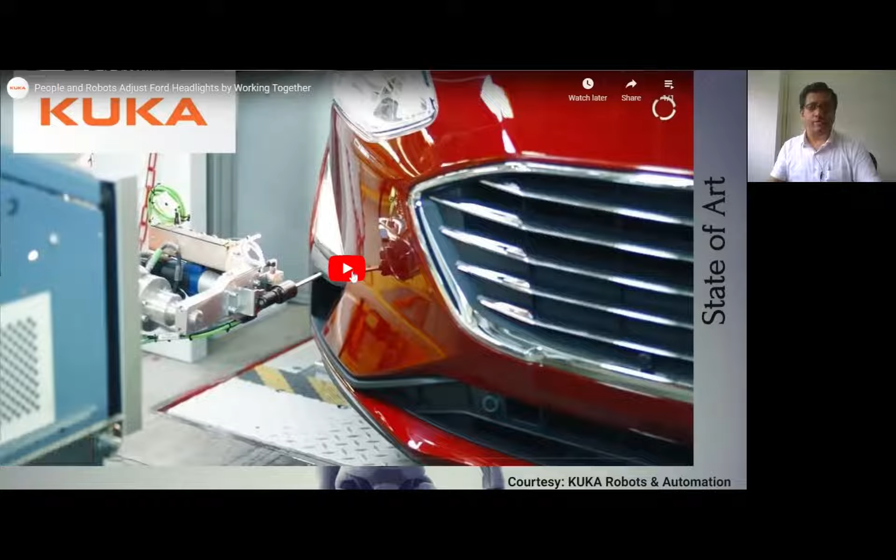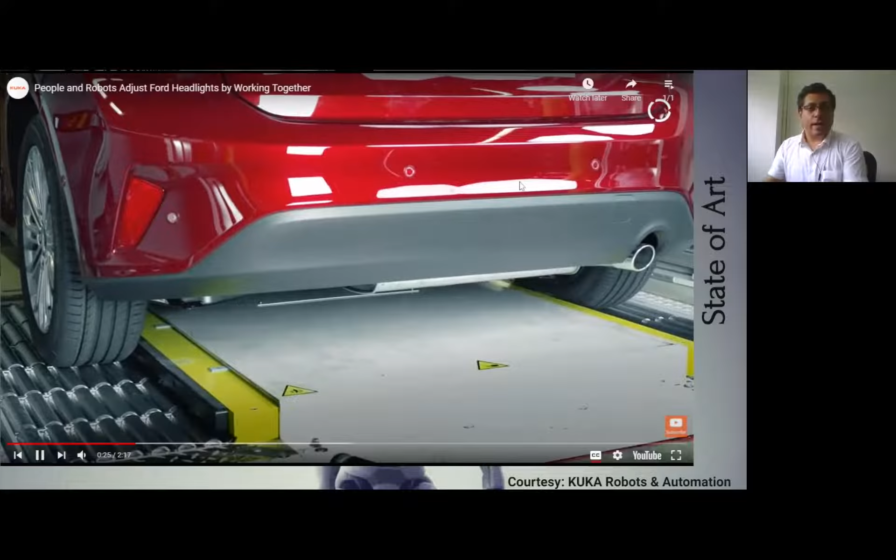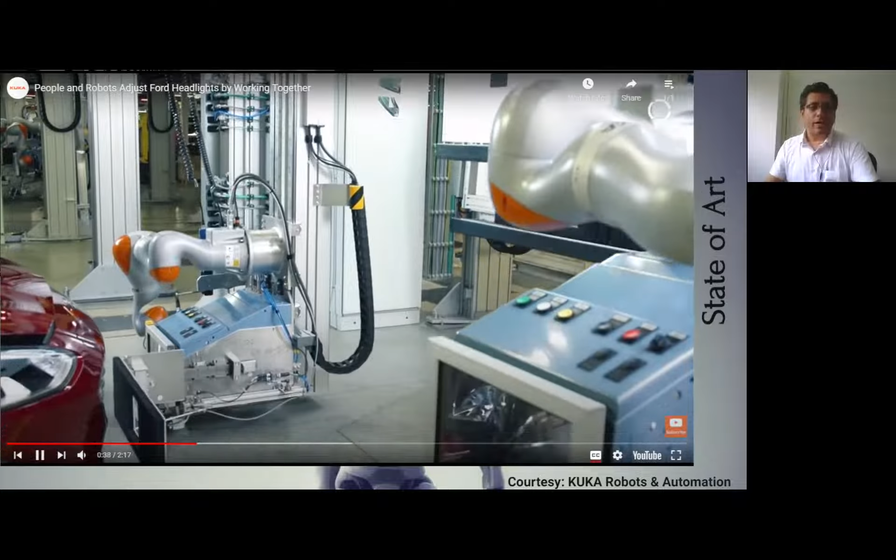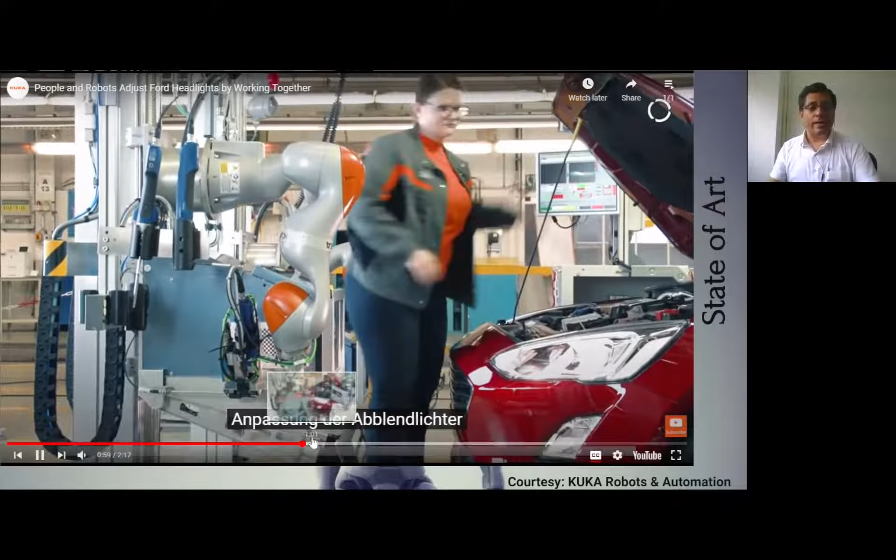What we see here is a Ford manufacturing unit where the headlamps are being adjusted by a collaborative robot. Here the robot works with some accessories or ancillaries, so I think the important part to show here is robotics is not just the robots. Robotics is the subsystems. Robotics is sensors. Robotics is the integration of everything you see on the screen, as well as human interaction, where a person attends with the robots.

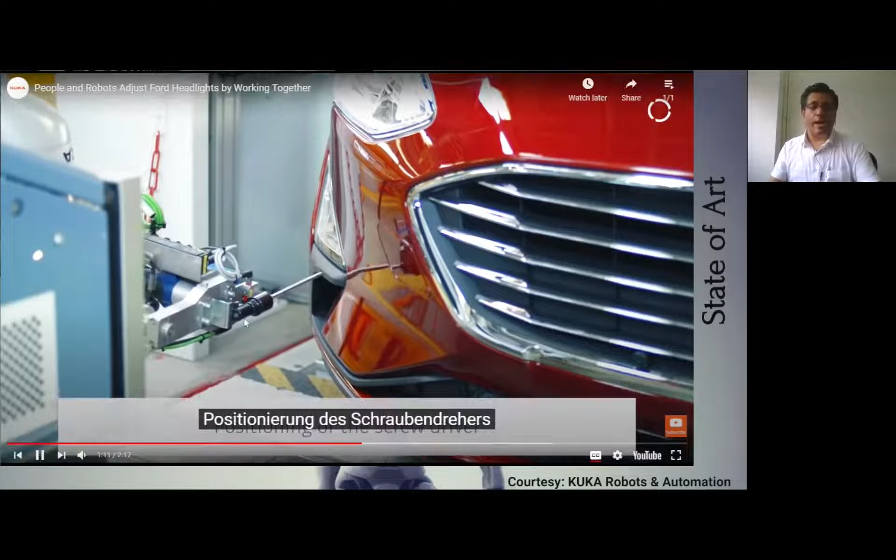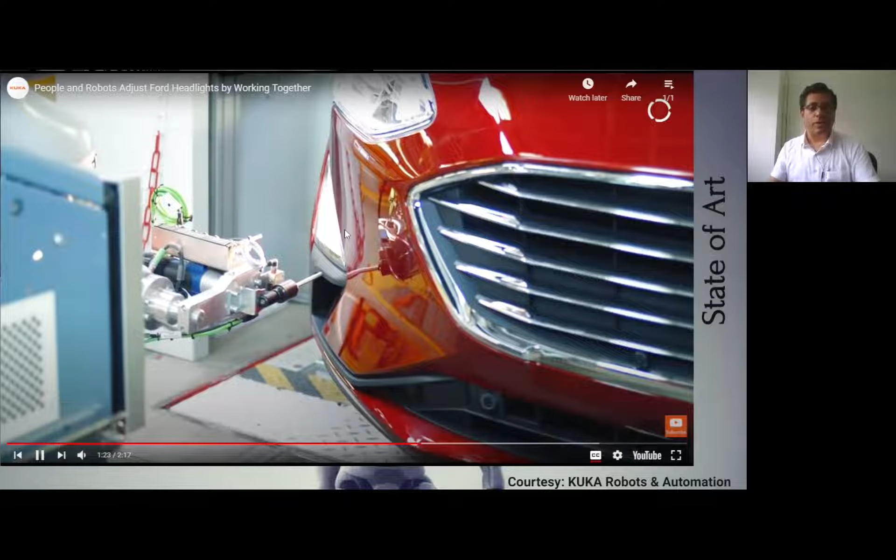So what you see on the screen is a robot that adjusts the focus of the headlight on the car, adjusting along with the person operating the vehicle or the setup. This brings a safety aspect as well, where people are working with the robots and using the technology along with it.

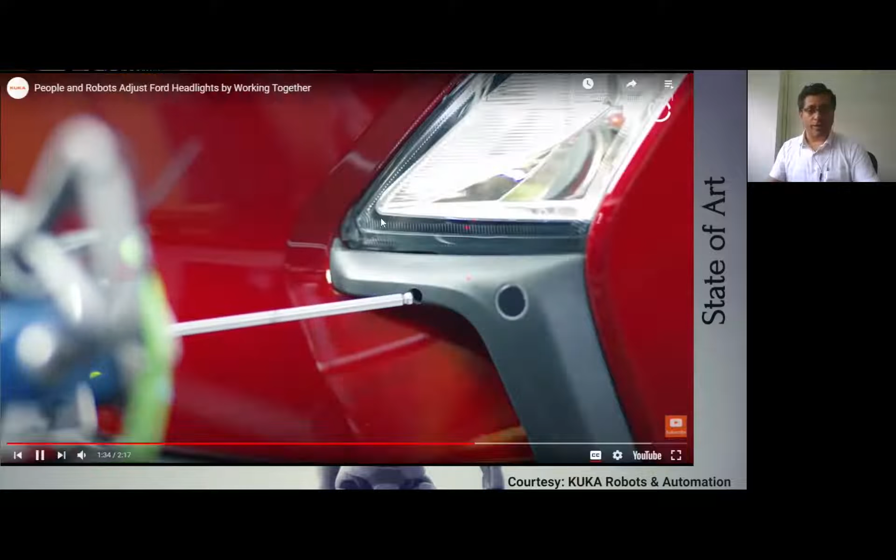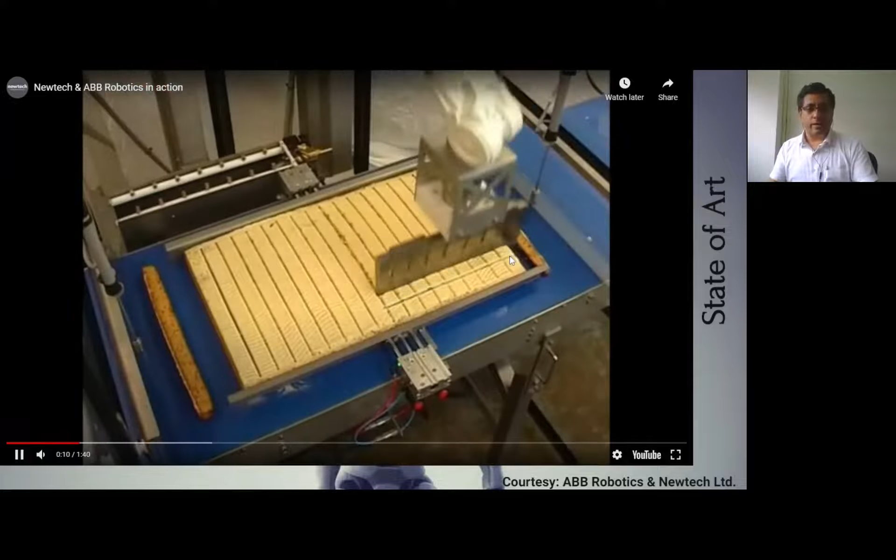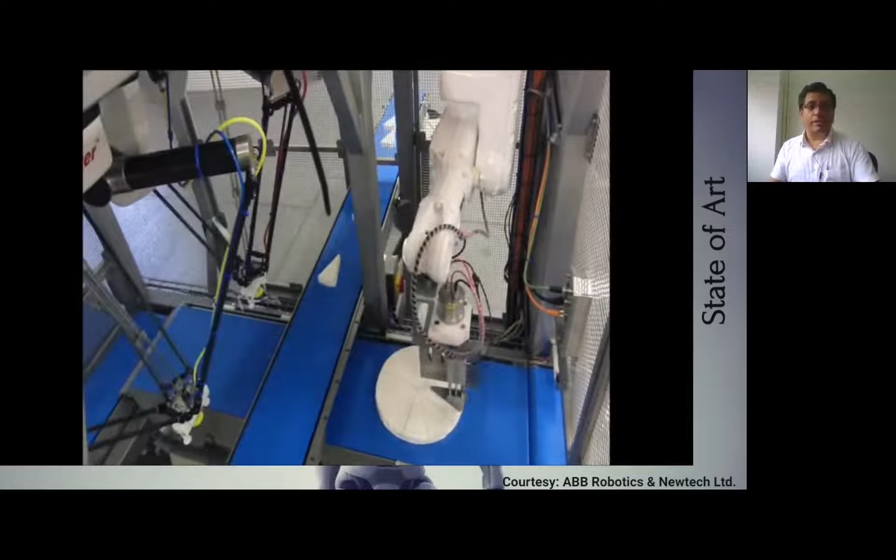I'll just move forward to the next video, which is pretty fascinating in terms of the flexibility and diversity it is handling. This is by a company called ABB Robotics and a Newtech Limited. This is, of course, taken from YouTube, but it depicts the flexibility or speed and type of robots you see acting fast on food grade items.

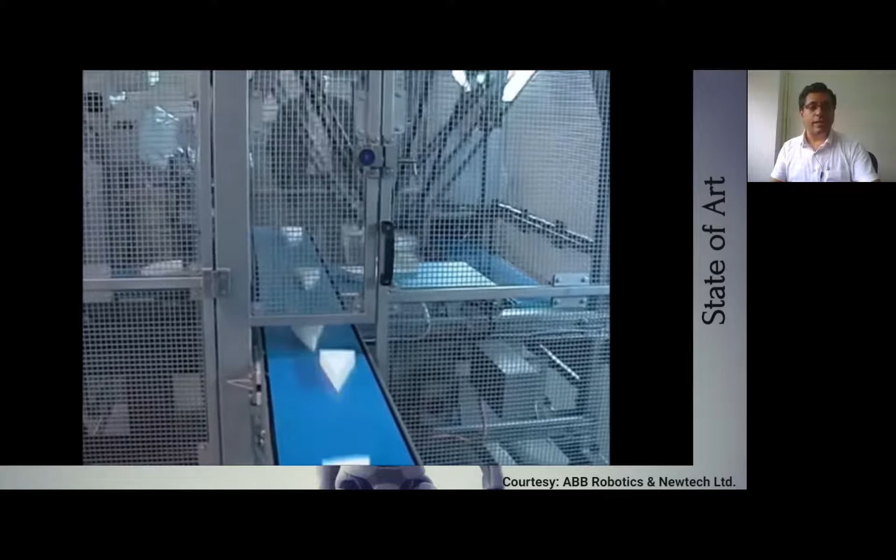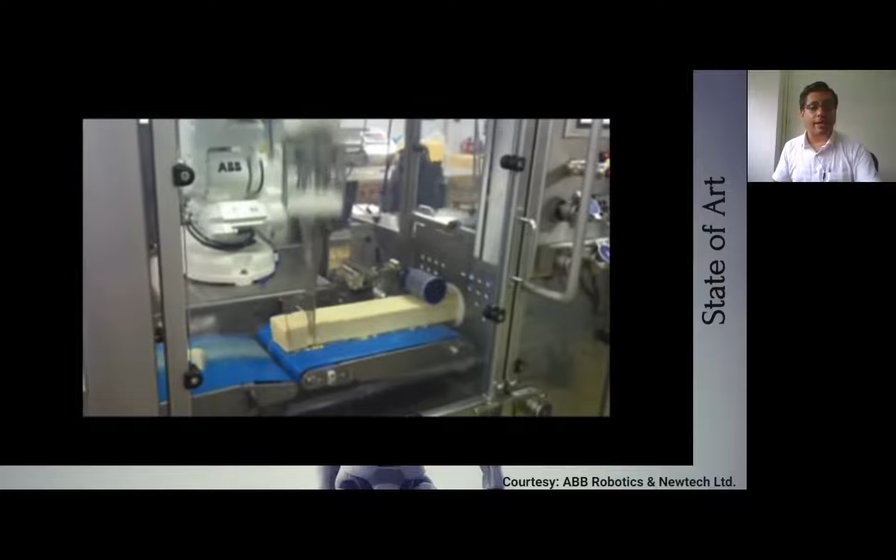So these are sandwiches, cheese blocks, chocolates, and everything. This shows speed, accuracy, and agility to handle food items, making sandwiches at the speeds required, and also being delicate to handle the food items. So it's not always about industrial items. Handling food grade products is also one of the leading areas where robotics are used.

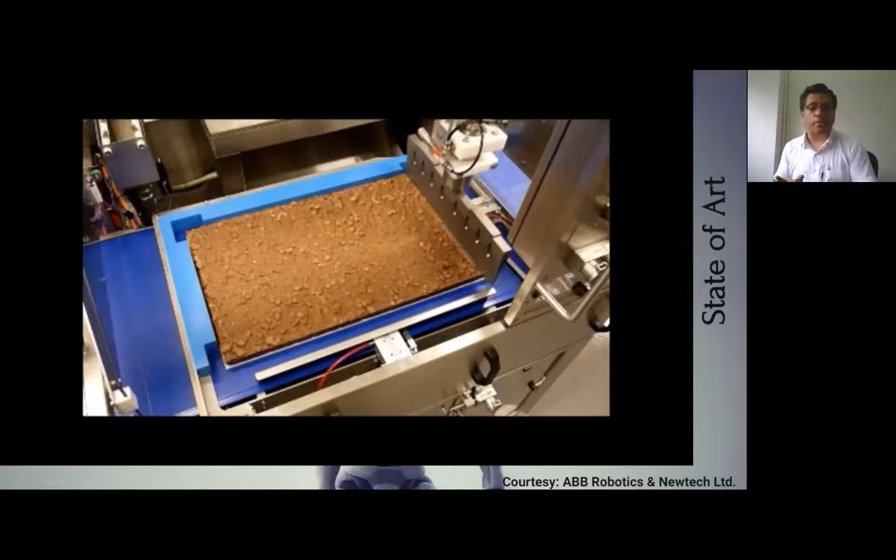Now, if someone wants to make this or handle this, what all things are needed, which we will cover in the next few slides.

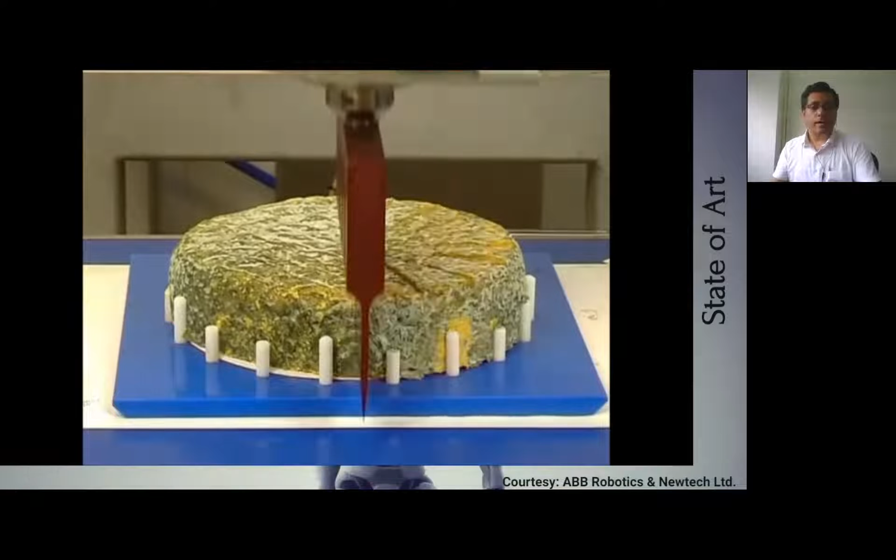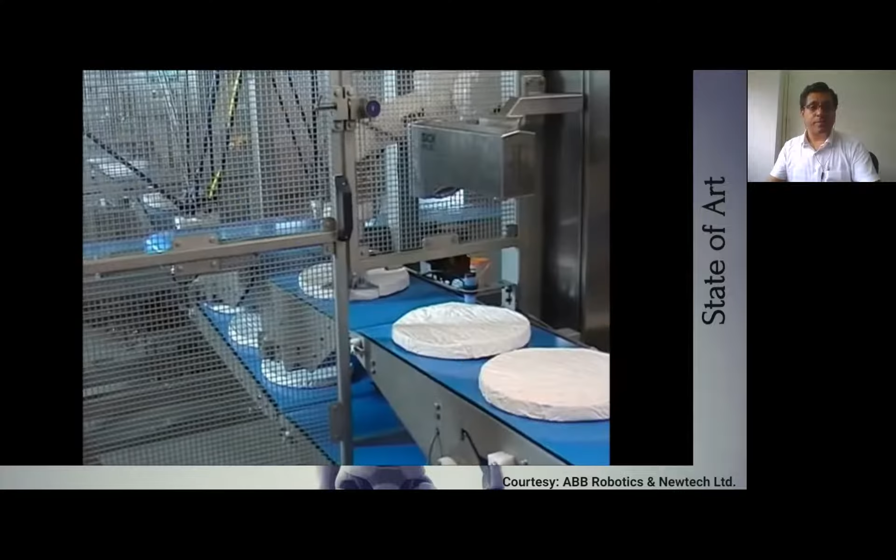Now, in solving these problems, there are many skills needed, which we will see. This is one of the very fast robots, which takes the cheese cubes onto a conveyor, in a feta cheese manufacturing unit.

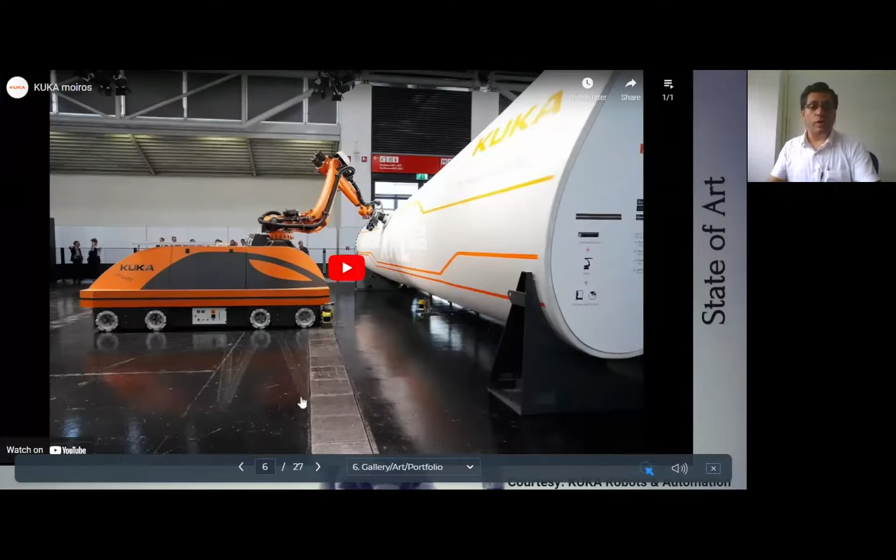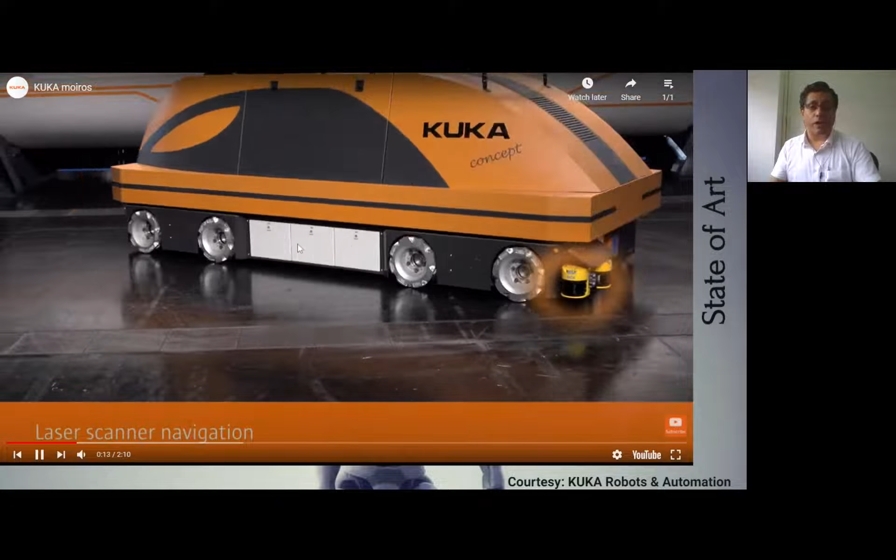We'll go on to a different type of robot, which we call mobile robots. The mobile robot is the moving type of omni-wheel robot mounted with an industrial robot. That becomes a very sweet combination of industrial as well as mobile robots, which will do certain operations on parts which are very big.

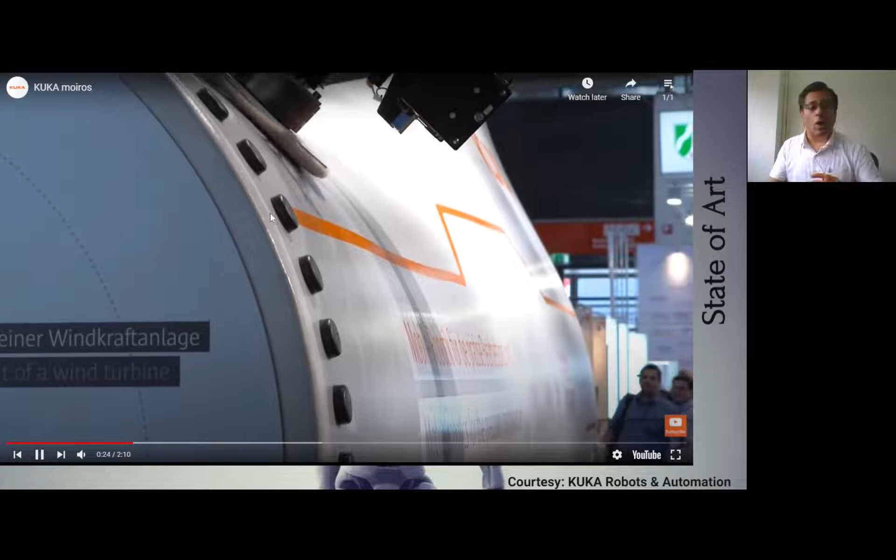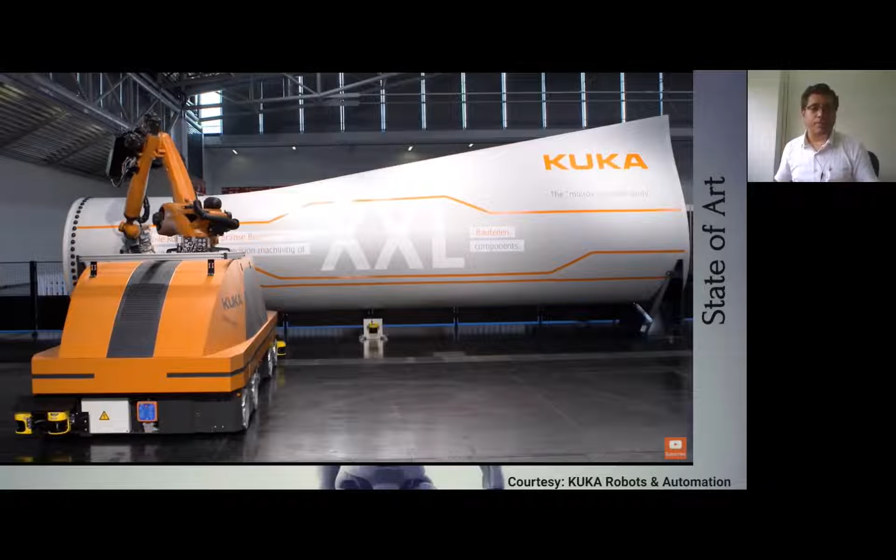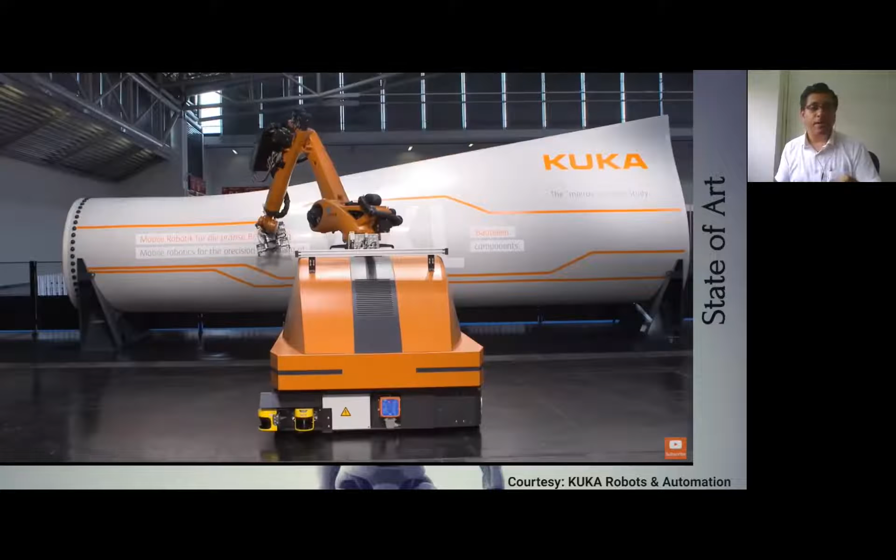So the robot cannot move on its own. It is moved now on a table or on a vehicle, what we call AGV, automated guided vehicles, or autonomous mobile robots. Today's webinar is limited to industrial robots, but this depicts integration of many technologies together. So there are grippers, machining or material removal processes, sensors, safety sensors, and a shop floor process. All these are depicted well in this video.

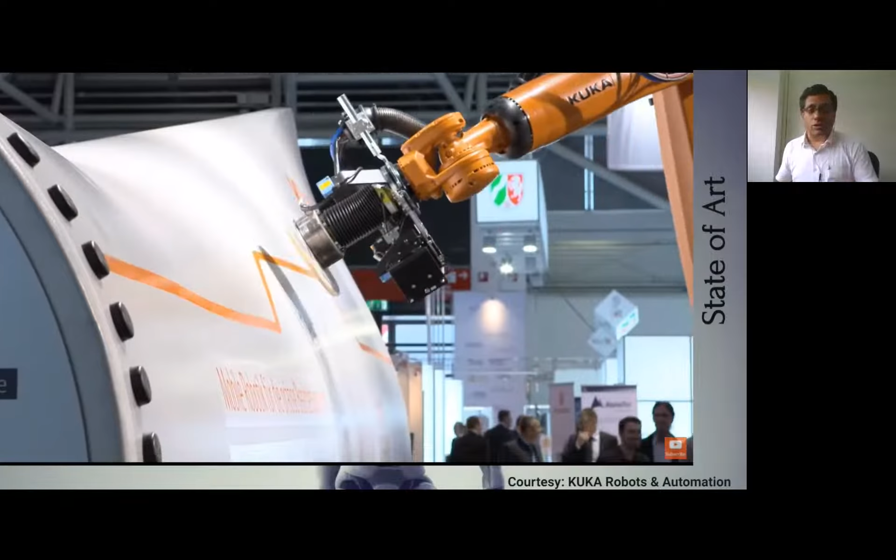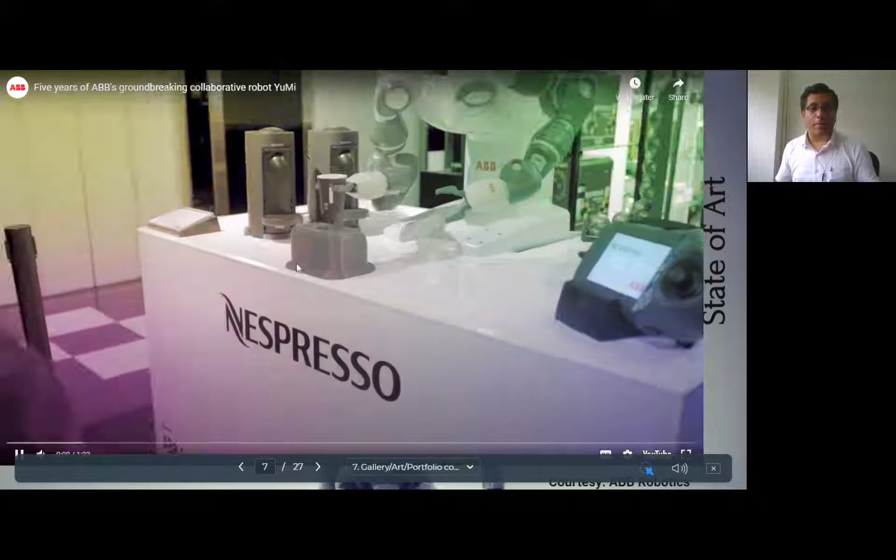What looks like a good solution in the video took many hours to make. I'll move on to the next video, showing the upcoming future of robotics: collaborative robots.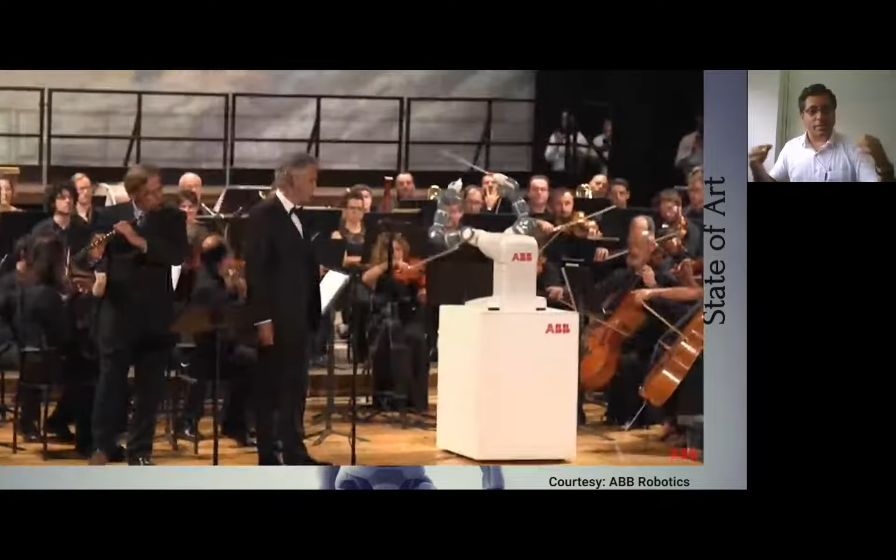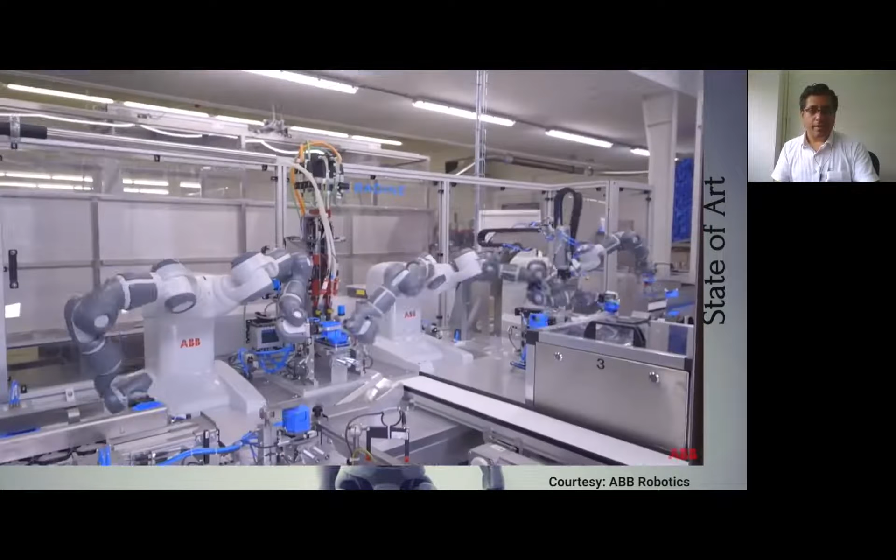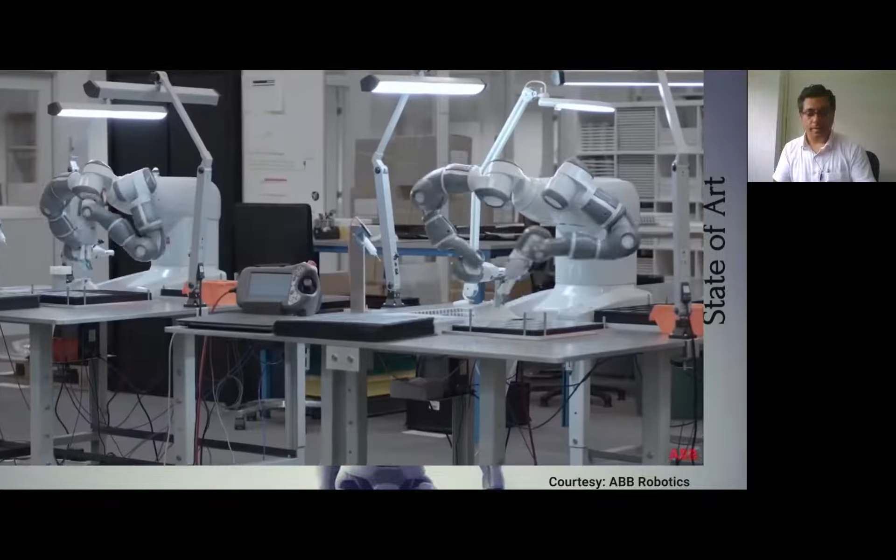This collaborative robot has two hands that depict human hand movements. It's safe to operate. For industry, the advent of a truly collaborative robot working alongside human staff has been little short of a revolution. The robots work with human operators safely, so operators don't have to stay behind cages. Ergonomic human-centered design, padded arms, and motion control software can be installed in workstations alongside people, working collaboratively on tasks with human colleagues. Lead-through programming means it can be programmed in minutes by someone with no specialized training. That makes it ideal for material handling and assembly jobs, while its accuracy has meant it's found a place in medical research too, increasing hygiene and efficiency.

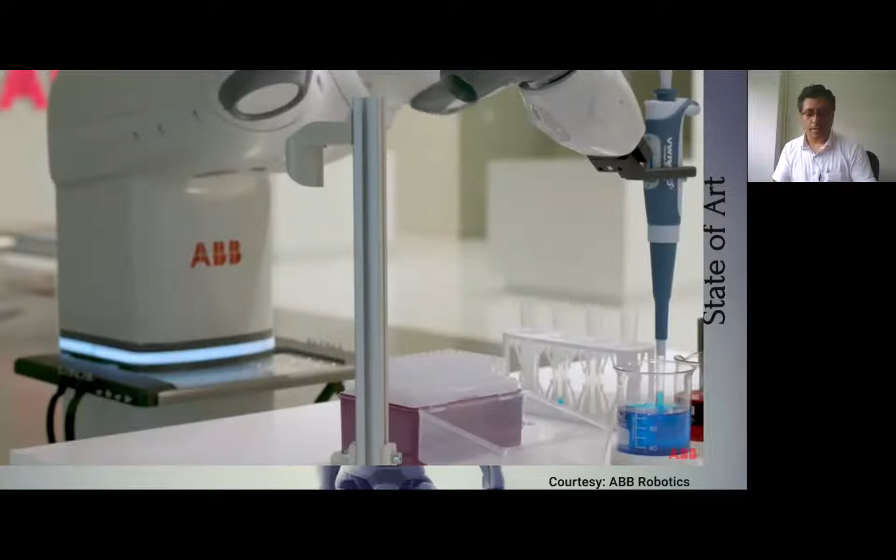The YuMi family has continued to grow. The concept of a mobile YuMi has been tested, so now the collaborative robot mounted on a mobile robot makes it more effective.

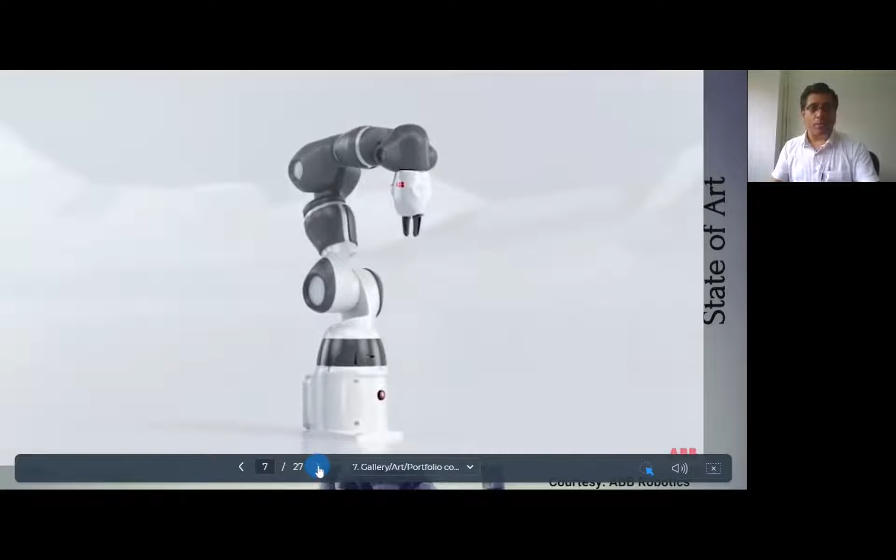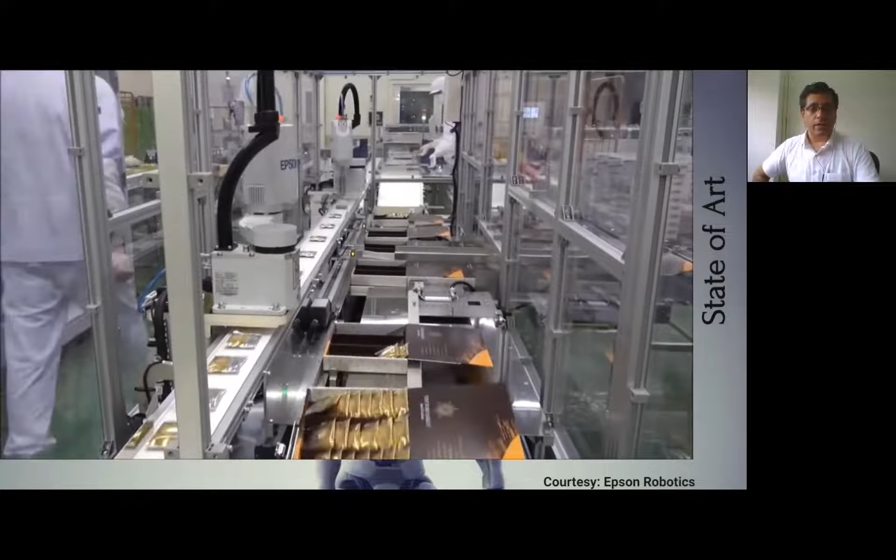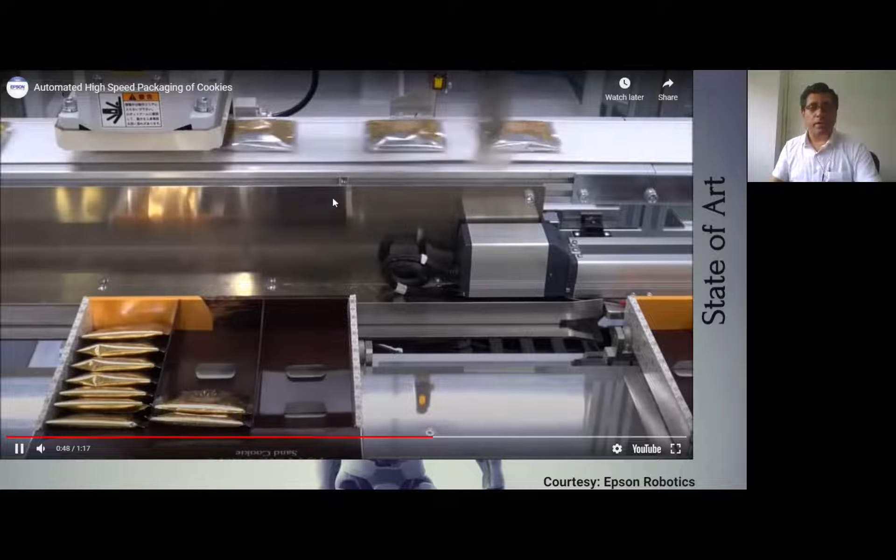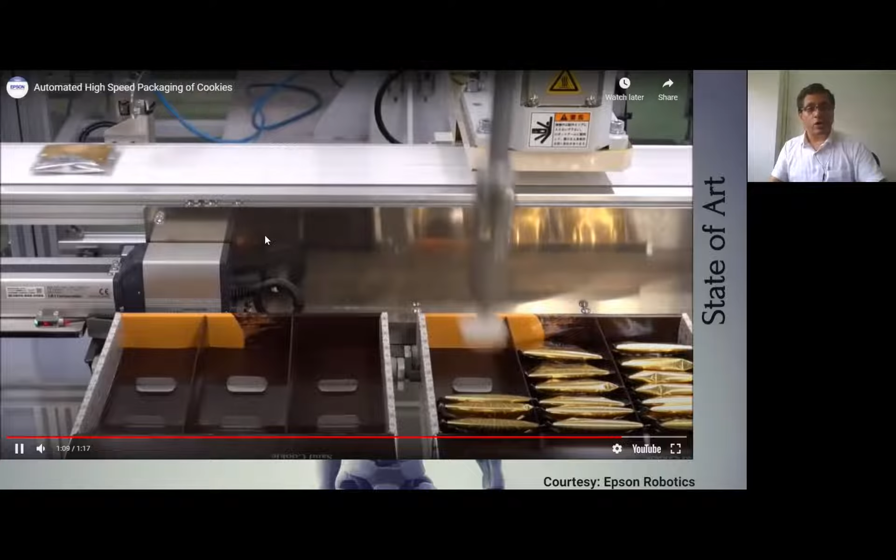What you see on the screen is one robot operating, but you should also see all the sensors blinking around, all the conveyors and conveying systems, and the control system commanding this. You'd see a lot of motors, conveyors, and sensors on the back end where my cursor is moving. So many things go along with robotic solutions, and we'll cover what it is.

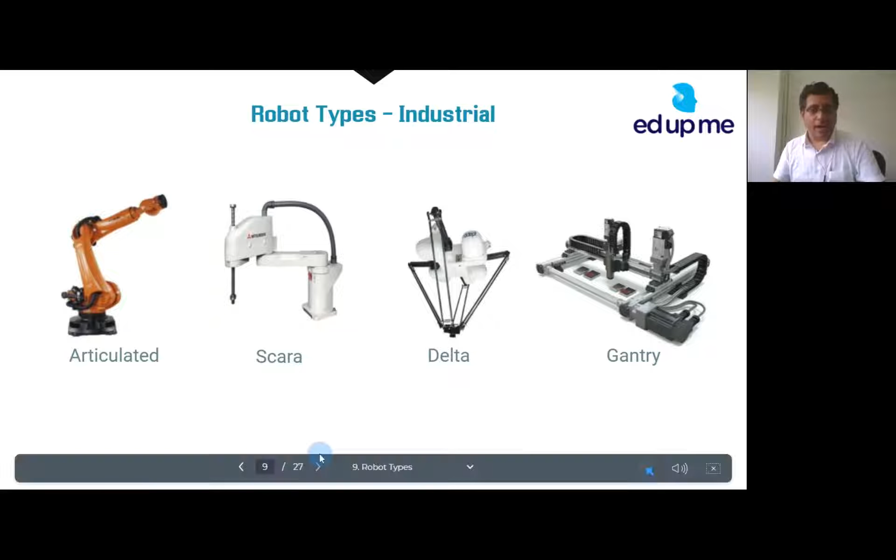Typically, there are four major types of industrial robots for any robotic solutions: starting with the gantry on the most right-hand side, which is a 2, 3, or 4-axis solution, a primitive but widely used and known robotic system. Delta is one type of robot mounted on the ceiling, around 4 to 5 axis. SCARA is around 4 axis, and articulated, on the most left, represents human hand-like motions. We will cover all these robot types and how to select, when to select, which is the major point of this webinar.

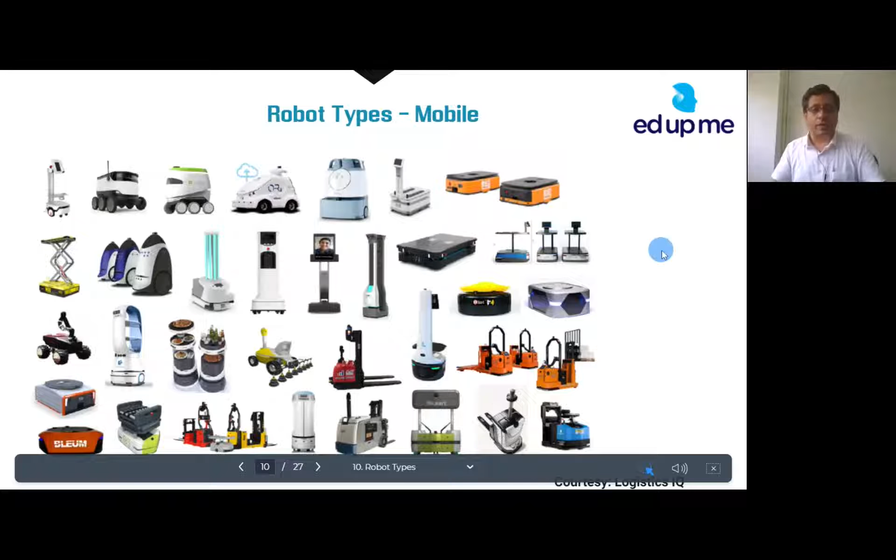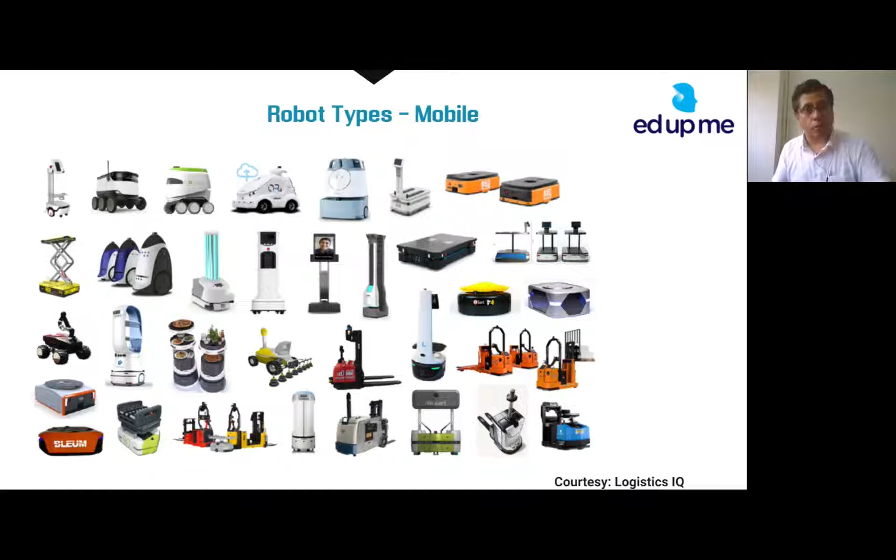Before that, we will also cover some mobile robots in the next webinar sessions. This is interesting, just to keep the sensation going: these are the types of mobile robots now available in the market for various applications, starting from food delivery to video calling, hospital sanitization, warehouse moving, inspections, material moving, and so on. This is becoming a newer market now, with an onslaught of mobile robotics happening. When industrial robotics is attached to mobile robots, it opens up a whole new opportunity for the market out there. This is just to set the tone.

On robot selection, we have divided it into a very basic aspect. I'm sure the audience will see how we approach this, because of our experience integrating a lot of robotic solutions, from ground zero upwards. The first criterion is application. That's where normally a robot selection starts, which is the environment.

Due to space restrictions, we've listed only 4 environments: hazardous or dusty, EMI-free which relates to electronics assembly plants, and clean room, which is pharmaceutical and most difficult because of the current COVID crisis, where viruses or drugs have to be contained within a requirement. Why does environment come first? Because if we remember the first slide, some robot types may not come with that configuration. So when we say configuration, if it's a clean room requirement, not all robot types come with clean room settings or ability, or EMI-free capability for electronics. Not all payloads or sizes come into that configuration.

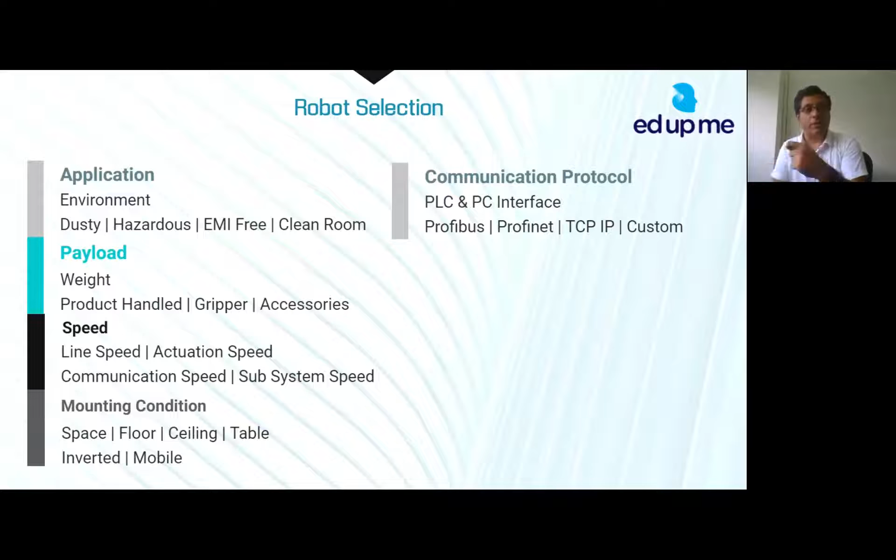Now, if we are asking a robot manufacturer or a robotic system integrator, they would have all the tools to integrate different communication protocols. But the robot itself, the type of robot may not have, or the brand of the robot may not have all the communication protocols available with them, which might limit the selection of the robot. So going back to memory, if a SCARA robot has to be used, there are n number of manufacturers out there - not all offer Profibus, Profinet, TCP/IP, and so on. So we are not particularly aiming at a brand, but this becomes a limiting factor when we are deciding a robot, as well as a PLC system, as well as the accessory systems, because of the choices of the manufacturer, choices of the end client. For example, end client ABC would always recommend using brand X, Y, and Z. Now those brands X, Y, and Z may not have all the Profibus, Profinet, TCP/IP, and so forth, so the brands will be limited, the selection will be limited, type of robots will be limited by the communication protocol available.

The next is the IP rating, where of course this goes along with the application environment, which is the dust and water resistance. But this also makes some difference in terms of where the product is designed, where the cell is designed, where the whole solution is designed - what level of IP protection we need for a robot and the controller. If that is not available, it will limit the use of that particular type of robot. So even if everything else is ticked off, but if the IP rating is not ticked off, we may have to change the robot selection.

A good point is the positional accuracy, which is the repeatability and the accuracy versus speed versus payload. Now this is also a sort of iterative process where we want a particular accuracy. So let's go back to the memory lane, the food products which were being handled - you won't like it if your feta cheese or pizza is not cut as a particular triangle. So that becomes the repeatability, how repeatable it might be. So let's say for a food item you are okay with this, but if it's a machining operation in industry, you want it to be accurate.

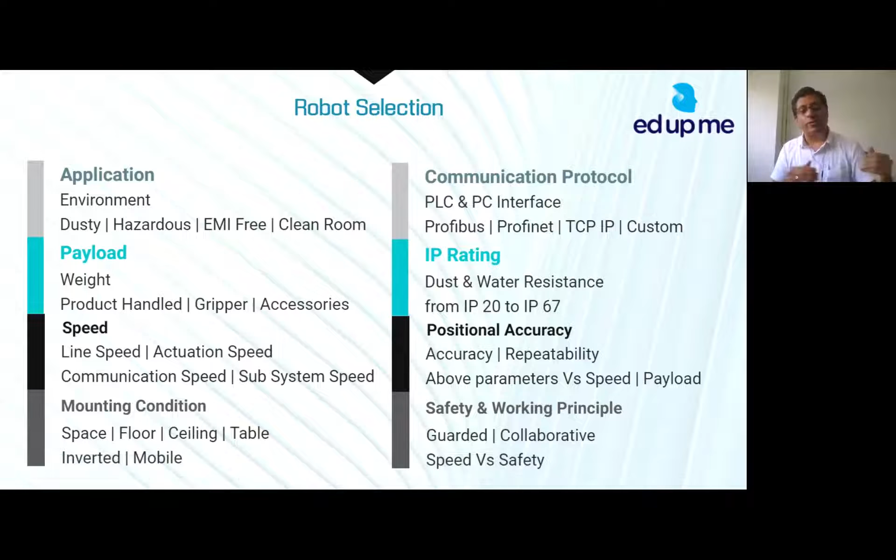The last but not the least - how would you handle the new buzzword, collaborative robots, speed versus safety versus guarded robots? It's a big debate out there, and I think we'll need about more than 10 webinars, 10 hours long discussion, of collaborative, high collaborative, guarded robots, or the normal industrial robots. Why that - and safety versus speed versus ROI.

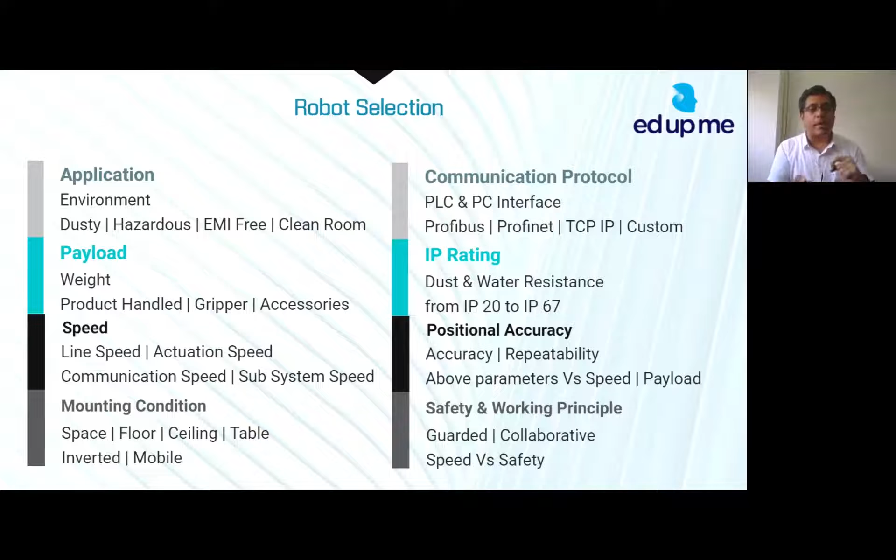So giving the whole picture, starting from application, that goes on to IP rating, payload, goes on to the accuracy and the safety, and the protocol speed, speed being intertwined with the communication protocol and mounting condition. So all these put together makes it. So if anyone wants to select a basic thing on any automation or robot selection, these are the 8 parameters where we would start. Of course, this webinar is just the outline or the introduction. There are a lot of details on every point, a lot of ifs and buts and a lot of iteration on everything, which we will cover in upcoming webinars.

A quick recap on the type of robots we just saw on the first screen. When we say these speed numbers, these are picks per minute, or operations or cycles per minute - these are just a representation.

We would find exceptions on every type of robot. For example, a SCARA robot can go up to 150 picks, Delta robots can go up to 280 to 300 picks. That depends on the solution, the speed of communication, the speed of the conveyors, and many other things - it's not just the robot alone.

When it comes to payload, industrial robots are the absolute winner, where we can have as large as 1300 kgs and beyond. Generally for food items where the weights are less than 20 kgs, we're talking 200 grams to 1 kg - these are used at very high speed, so the weight reduces down.

The same applies to SCARA robots, and gantry robots are the most primitive in nature, but the cost is low. So when cost comes into play, gantry becomes the winner. Cost is again a subjective thing for both these robots - we are not comparing apple to apple.

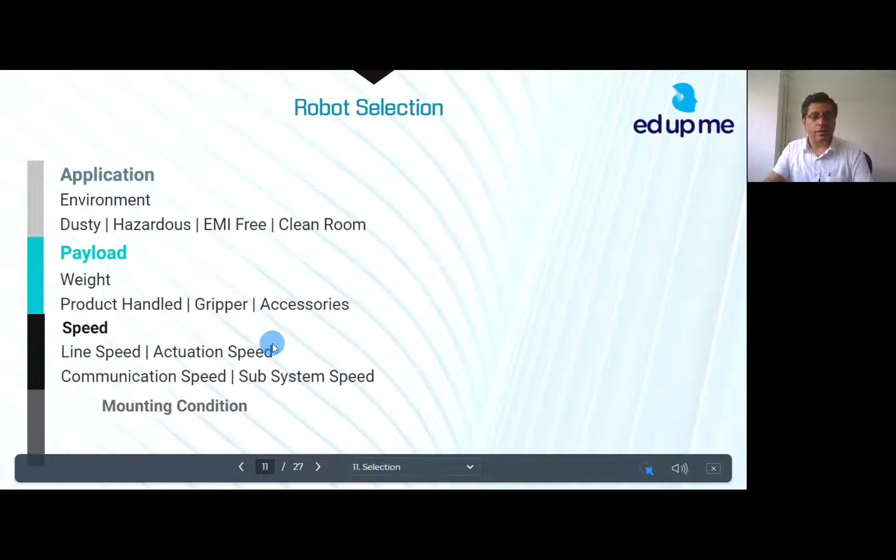This might become a limiting factor. If we go back to this slide - I'll quickly bypass the animation... sorry, there's no way to bypass the animation. Let's just do a recap.

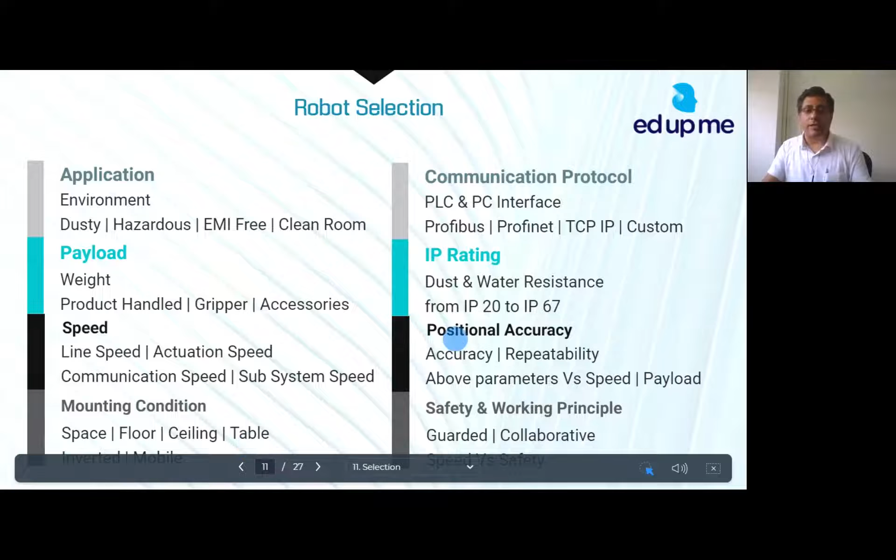Let's make this table more effective with those 8 parameters, where the speed is low or could be very high. This gives an initial table of selection where we tick what the speed is - if very high, then you're looking at these two types of robots.

What's the cost allowed? If it's low to medium, we are limited to these two types. If the flexibility we need is important, we are definitely looking at these three types. And if the payload we are looking at is, say, 200 kgs, we don't have any options among these three.

They cannot be done - of course, gantries can do it. Just imagine industrial cranes as the gantries, but they are not robots. So we are limiting ourselves to industrial automation in this context.

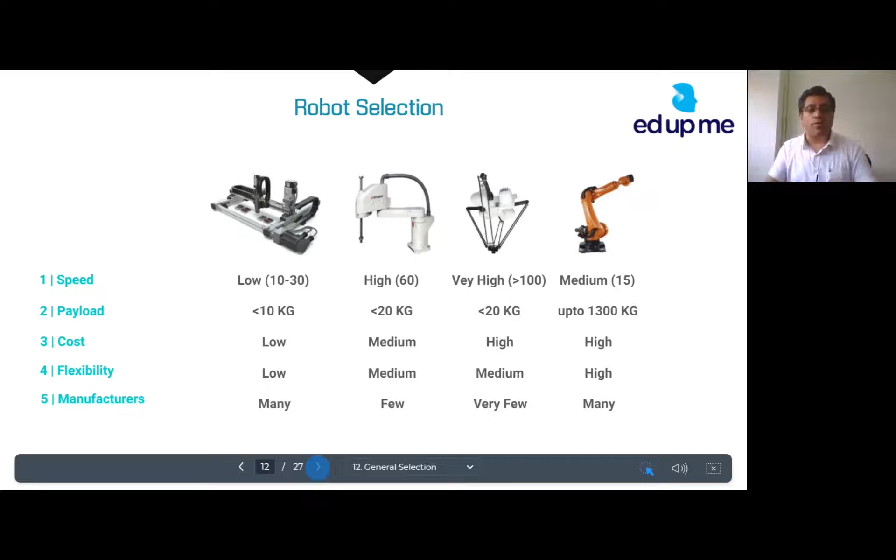I think this is the major point - how would we select the robots? This is a typical skill circle, or the integration circle, that we need.

Now this will be an interesting turn - we are not only looking at engineering branches here, we are looking at a lot outside engineering as well. This is where people think robotics is just mechanical engineering - no. People say robotics is communication, or EC, or IC engineering - no, robotics is much more beyond that, which we will see.

Typically we would see this as a skill circle, starting with identifying the need, then the solution, then the design - yes, mechanical engineers and communication engineers come into play where the design happens - and then the implementation, where other aspects come in. So we'll quickly move on to looking at the need analysis.

Typically, for any industrial robotics solution, we say understand the need. Now this is where non-engineers come into play - economics and ROI.

Any solution on a larger scale will require economics and return on investment calculations. How would they do it if the costing part, the commercial aspect, isn't clear? So it's not just engineers - this is where we need a lot of management tactics to find out what productivity improvement we are achieving.

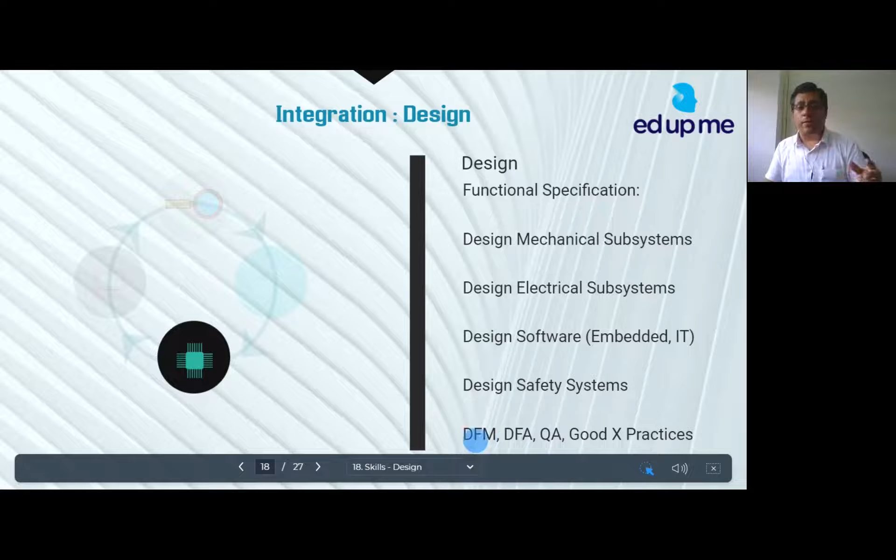Hardcore design component, where we do functional specifications, design mechanical systems, electrical subsystems, design software screens, and connect with ERP systems. We do DFM, DFA - these are all understandable for design engineers. Typical examples I won't cover more since this is for mechanical and electrical engineers, using CAD, panel wiring and standards, embedded system design, software architecture, computing systems, and knowledge of cyber physical safety systems.

This is the buzzword nowadays, where a robotic system - the physical system - is connected to the IT system and sending out a lot of data. This is proper engineering, and it's quite a fascinating field because it's the real design at the core.

This is also a cross-engineering skill circle. Implementation is not engineering alone. Implementation is manufacturing, implementation is programming, where we are not looking at any mechanical or electrical engineering.

It's the quality assurance. We're looking at Six Sigma, 5S, and Kaizen practices. Nothing specifically to engineering, because that's where people are hired for bringing the quality assurance in place, quality control in place, installation, commissioning, and training.

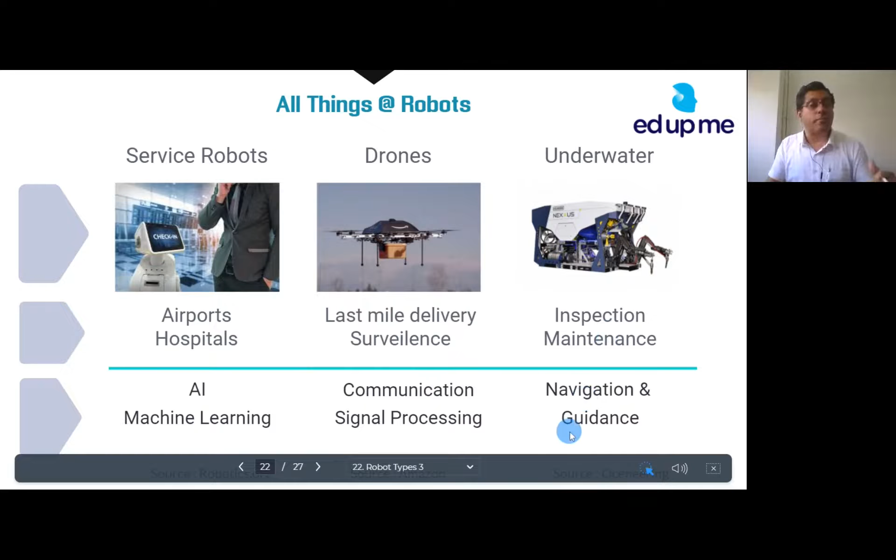And then just here, Tesla's out there, where Tesla is an automotive vehicle, but we just heard Elon Musk saying they are the latest robotic sentinels mounted on wheels. So that's the proper way to put it, where the technology is going beyond industrial robots. We imagine industrial robots will have AI and machine learning, a lot of navigation and guidance when mounted with the automated guided vehicles or the mobile robots.

Going forward, the path forward, what we see is mobile robots where we have a lot of AI, and fleet management, where three or four or five mobile robots, or 10 mobile robots, work towards a common function, augmenting the human operations. Cobots again augmenting, assisting the intelligence of human nature, maintaining the safety of the human operators, and of course, service robots, well covered post-COVID era. So these are the path forward going into robotics.

Of course, this is a very generic statement, and everyone would agree that automotive is the future. Now, we are not looking at automotive just as petrol and diesel engines - e-vehicle is also one of the booming factors here. Electrical and electronics, of course, that goes with automotive, cell phones, televisions, and mobile technologies.